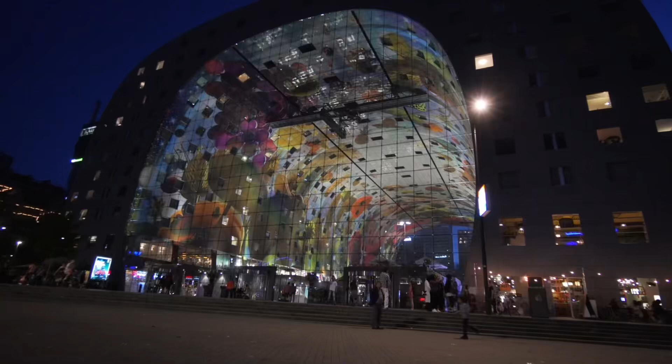The Markthal in Rotterdam epitomizes modern construction excellence, overcoming the city's unique soil challenges through innovative engineering techniques.

The project began with a robust perimeter wall employing a combined wall system of steel pipe and AZ-type steel sheet piles to mitigate groundwater infiltration and ensure stability.

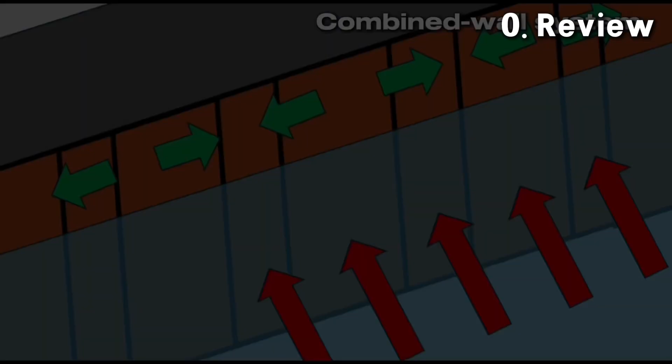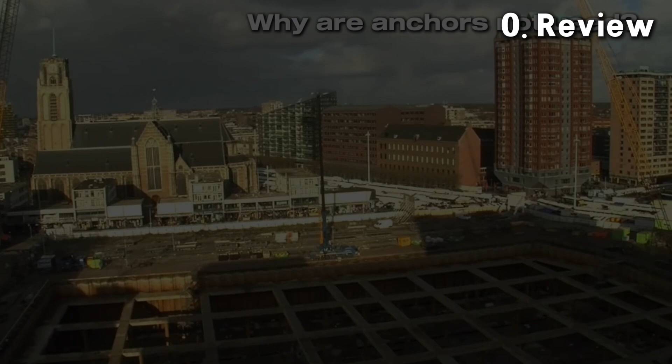A network of over 2,200 piles, initially functioning as tensile piles, anchored the structure, resisting buoyancy forces before transitioning to compression piles as floor slabs were completed.

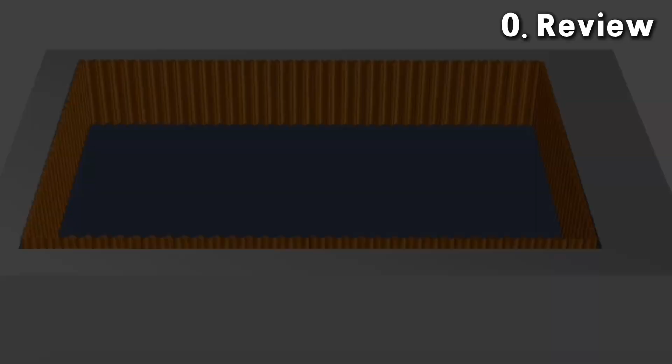To manage groundwater pressure and ensure soil stability, the construction pit was filled with water to levels above NAP early in the process. Excavation continued underwater to depths of NAP minus 12.1 meters and locally to NAP minus 13.1 meters before the installation of an underwater concrete floor.

This approach effectively balanced external pressures and enabled the seamless progression of the Markthal's construction.

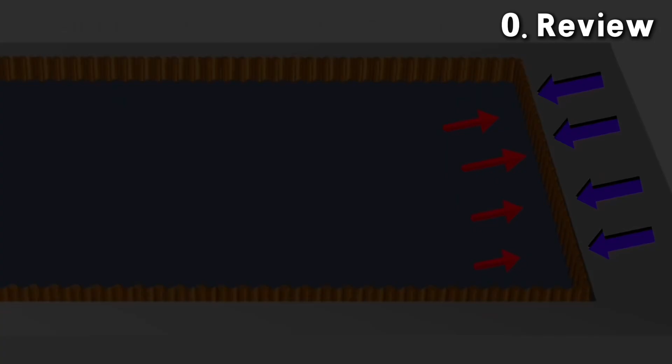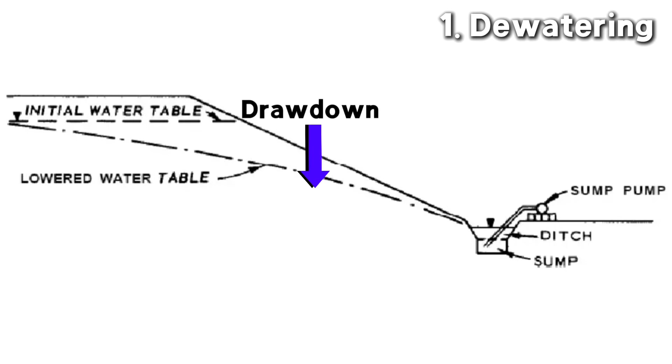It was initially uncertain whether any leakage could be adequately controlled using open dewatering on the pit bottom. Therefore, as a control measure, the dewatering plan included the option for pressure relief dewatering to lower the groundwater pressure to the excavation level. A maximum lowering to NAP minus 6.0 meters was imposed to limit effects on the surroundings.

Without well formation or leakage, the dry excavation required lowering the pressure head to about NAP minus 4.5 meters to maintain vertical stability of the cover layer.

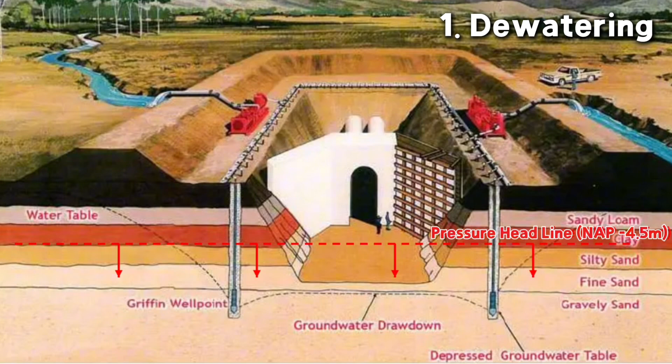In the end, no visible leakage occurred during dry excavation, likely also due to the horizontal anchoring of the Holocene cover layer from NAP minus 12 meters by the new foundation piles.

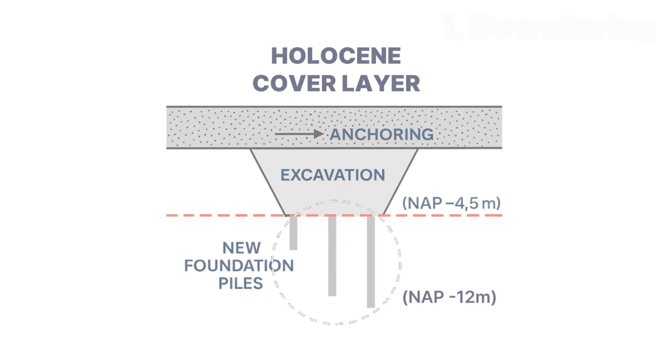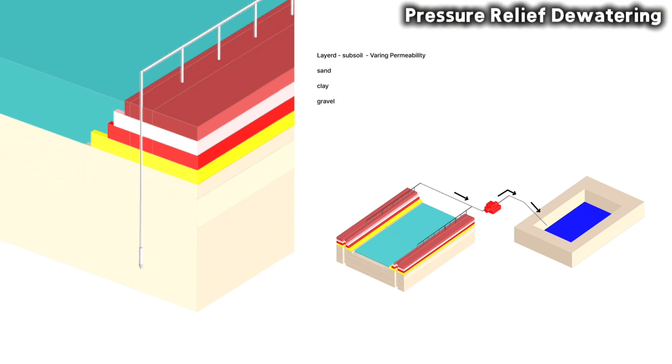This targets the lowering of groundwater pressure from deeper, confined aquifers. Deep wells with submersible pumps are installed around or within the excavation site.

To prevent uplift failure, also called heave, of the excavation bottom, especially before the construction of a heavy base slab.

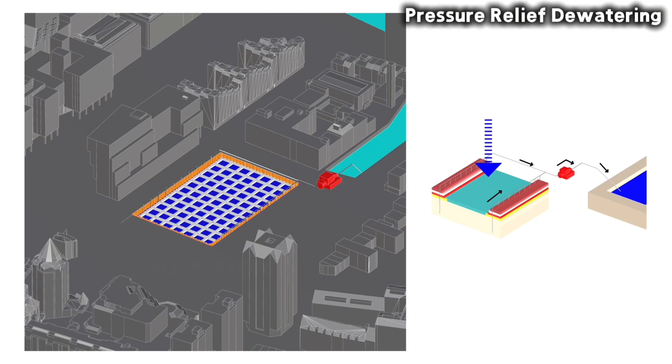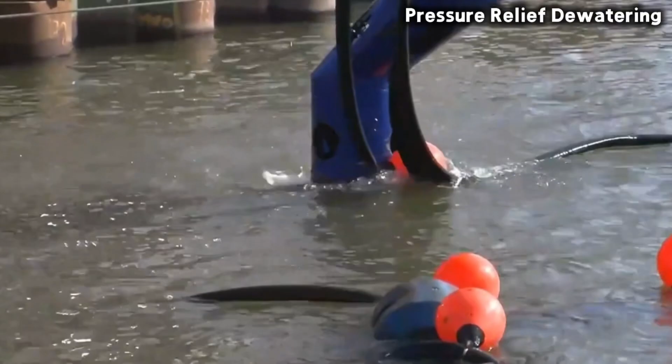Implementation: multiple wells were drilled to depths of up to 30 meters, each capable of pumping 45 to 55 cubic meters per hour. Monitoring systems ensured groundwater levels remained within safe limits to protect sensitive nearby structures like the Laurenskerk.

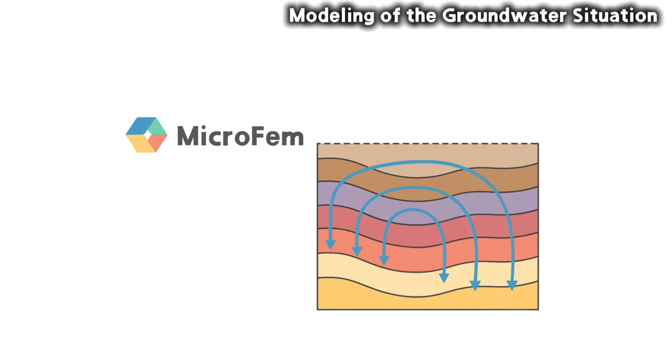To determine the effects of pressure relief dewatering in Rotterdam, a numerical geohydrological model was set up using the finite element program MicroFEM. The model consists of 6 layers.

The values for geohydrological parameters were taken from the groundwater map of the Netherlands and Regis, and then calibrated using long-term data from the Rotterdam Groundwater Monitoring Network.

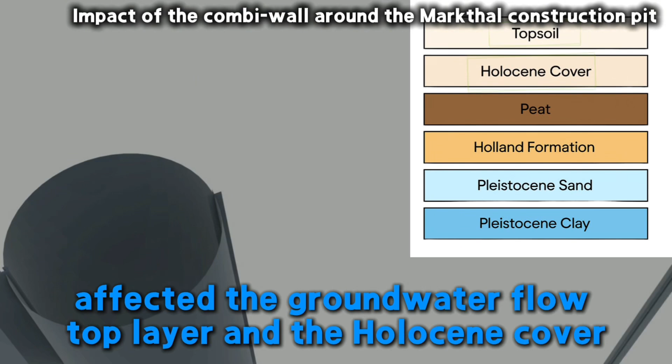The combi wall mostly affected the groundwater flow in the top layer and the Holocene cover. In the Pleistocene aquifer, there was no significant influence because the sheet piles didn't extend into the sand layer.

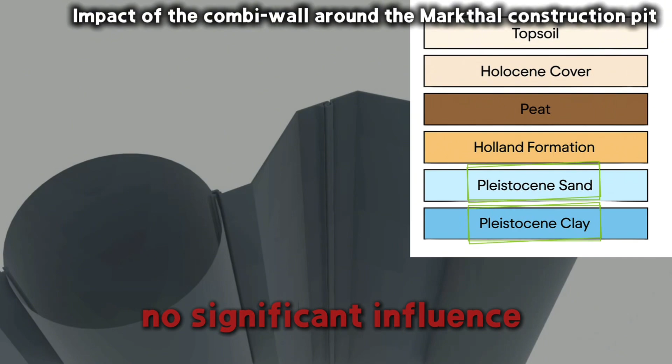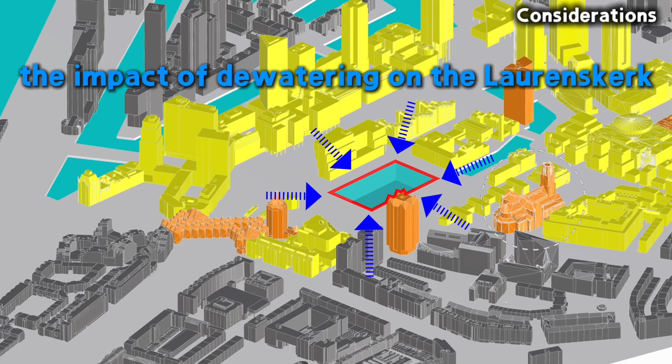The water demand for the Markthal's pressure relief dewatering is heavily influenced by whether other dewatering operations are active in the center of Rotterdam. There was a large water inflow from the river, and it minimized the impact of dewatering on the Laurenskerk by maintaining higher groundwater levels around the building.

However, this same inflow also posed a challenge, as it made it more difficult to achieve and maintain the required pressure head reduction within the construction pit.

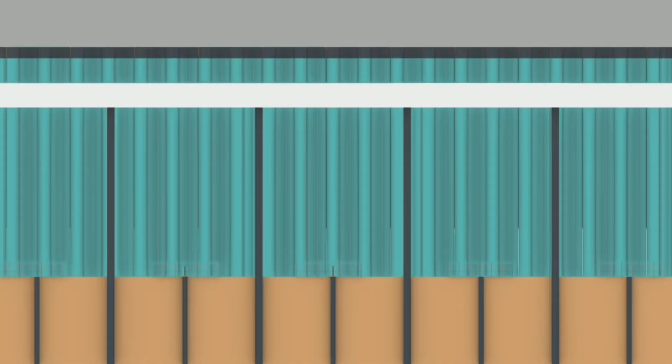Since the timing of various dewatering projects could change, 3 scenarios were modeled for the permit application. The final dewatering system design consisted of 9 wells, mainly concentrated on the south side of the construction pit.

To protect the historic Laurenskerk during the Markthal excavation in Rotterdam, engineers analyzed long-term groundwater data.

They determined that lowering the pressure head in the first aquifer to NAP minus 5.5 meters for up to 6 months would not cause ground settlement.

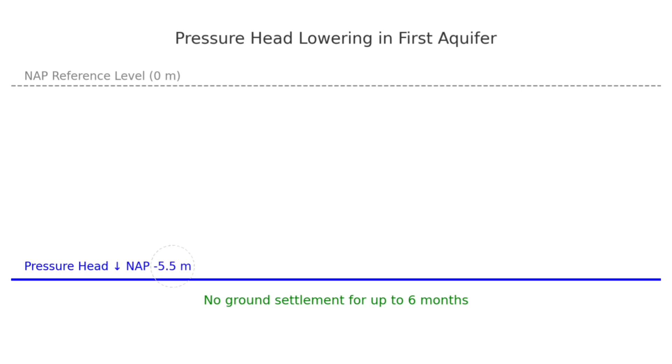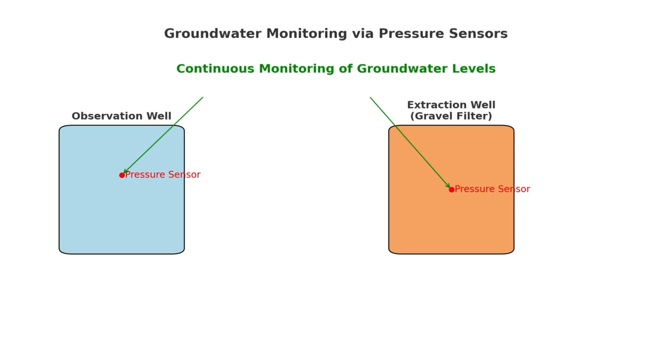The contractor, Jadon, implemented a dewatering system with 9 wells around the construction pit, manually controlled. Groundwater levels were continuously monitored using pressure sensors in 8 perimeter observation wells and within the extraction wells gravel filters.

All sensors and magnetic flow meters were connected to the Priva system, recording data every 30 minutes and providing real-time remote access. A deep observation well was also installed in the intermediate sandy layer, and the city operated a similar

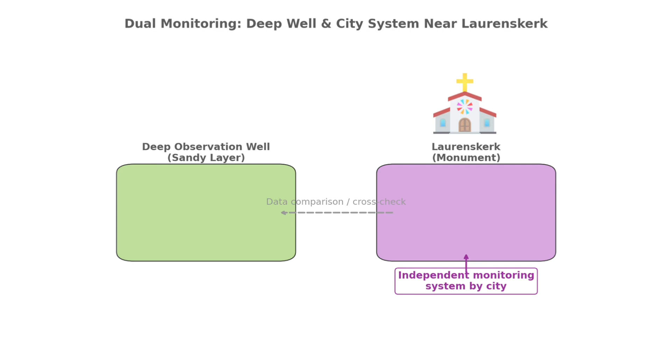setup near the Laurenskerk to monitor potential impacts. 7 wells operated regularly, with 2 on standby for emergencies, remotely activatable.

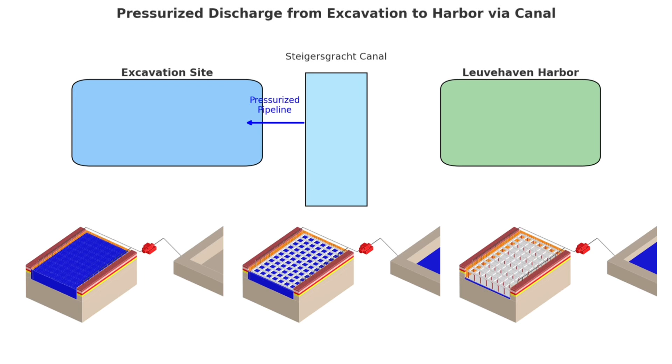Extracted groundwater was discharged through a pressurized pipeline beneath the Steigersgracht Canal to the Leuvehaven harbor. A booster station with pumps triggered by water levels in the sand trap and aeration tank maintained consistent flow.

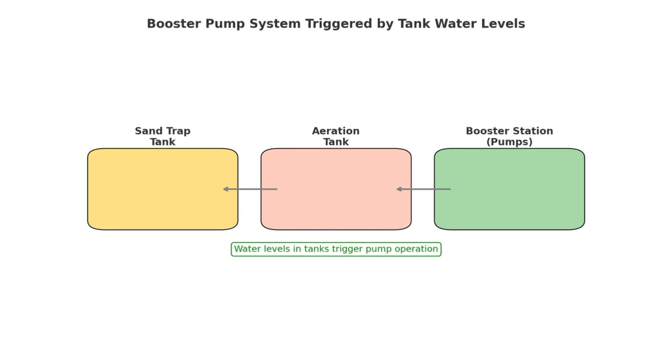A T-connector at the pit's northwest corner allowed re-infiltration of water near the Laurenskerk if needed. Monitoring showed slight upward ground movement over time, confirming geotechnical stability.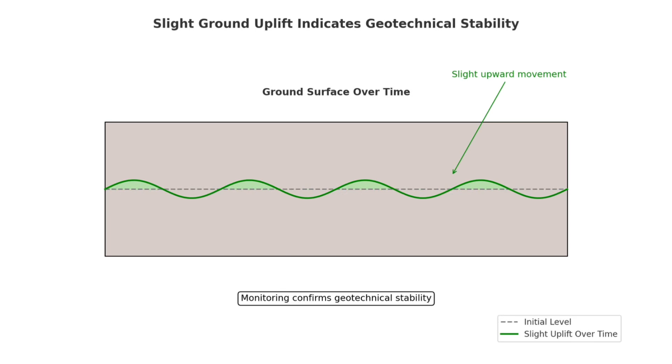In December 2011, a northwesterly storm raised Nieuwe Maas River levels, increasing groundwater pressure and uplift risk.

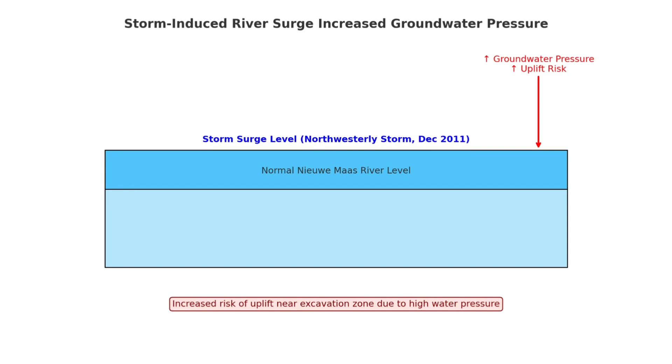Real-time monitoring via Priva enabled prompt pump capacity adjustments, effectively managing the risk and ensuring excavation stability. A careful dewatering process was undertaken, methodically lowering the water level to maintain structural integrity while paving the way for further construction activities.

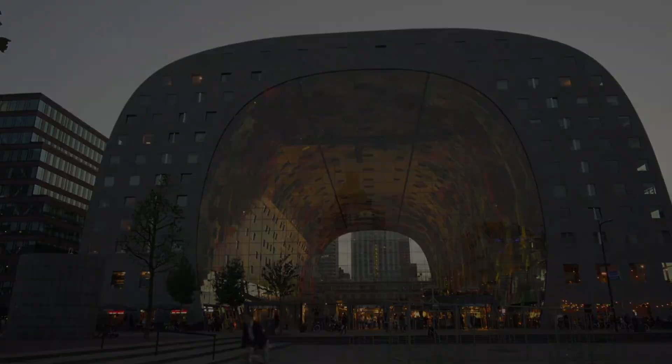As the foundational challenges were addressed, attention turned to realizing the Markthal's iconic arch through advanced engineering techniques. The arch was realized using tunnel formwork, with temporary support towers aiding during construction. Completion of the arch's structural system relied on highly tensioned steel cables that prevented outward thrust.

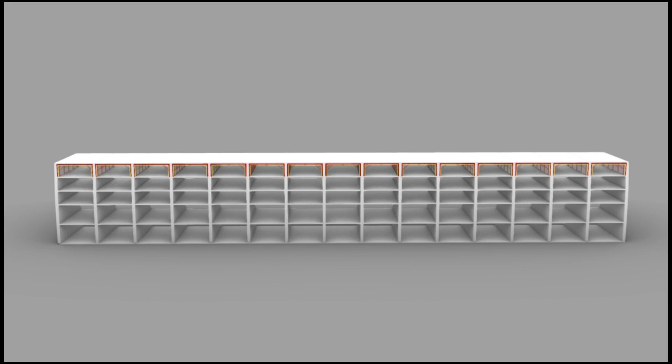The construction of the curved roof and apex of the Markthal's arch was one of the most critical phases of the project, requiring advanced engineering techniques to ensure structural stability. As construction reached the 10th floor, both arch legs were temporarily capped until the keystone was installed to lock the arch. This process helped maintain resistance to lateral forces during construction.

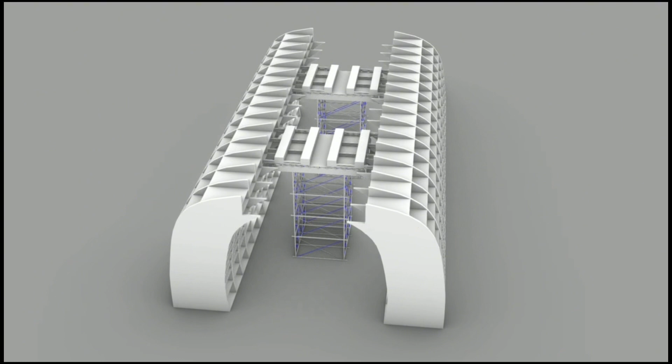To improve efficiency and control, the curved roof was divided into 4 main sections. Each section was carefully managed to preserve structural integrity during the build. For each section, temporary supports were essential. 2 large temporary support towers were installed under the arch to stabilize the 2 segments of each floor during both the construction and curing phases.

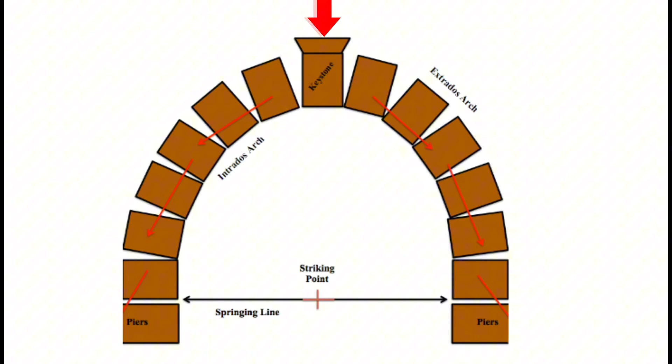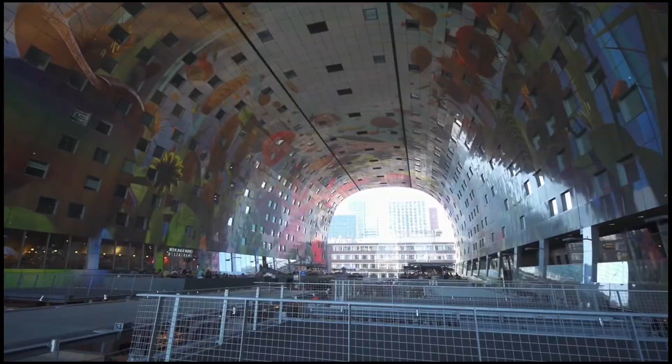The arch was completed with the placement of a central keystone element at the apex. This keystone was critical in locking all 4 roof sections together, enabling effective load transfer from the roof to the vertical legs and eventually to the foundations. After installation, the arch became self-supporting, with loads channeled down the curved structure through compression. This eliminated the need for internal columns, allowing for a spacious, uninterrupted interior.

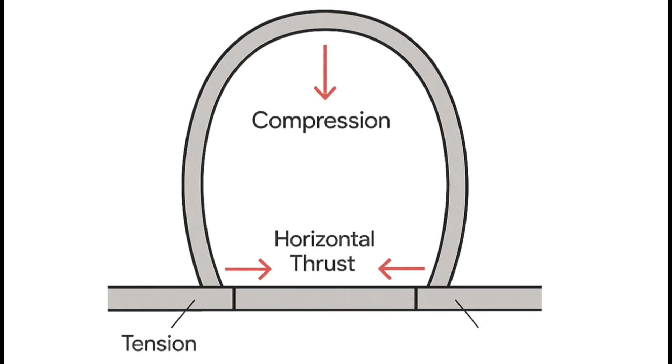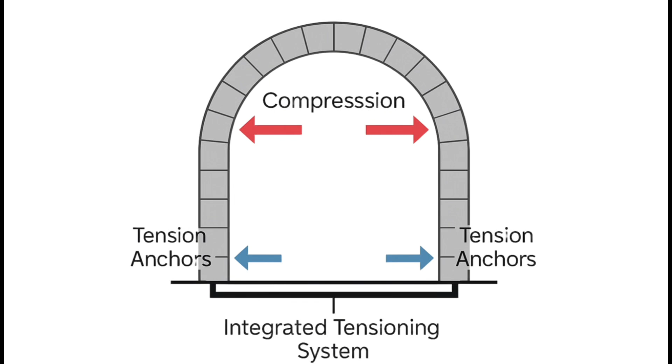However, the compression forces generated horizontal thrust at the base of the arch. To counteract these forces, tension anchors and integrated tensioning systems were installed beneath the structure. Additionally, the building's glass facades contributed structurally, acting in tension to help stabilize horizontal forces and forming part of the building's closed structural loop.

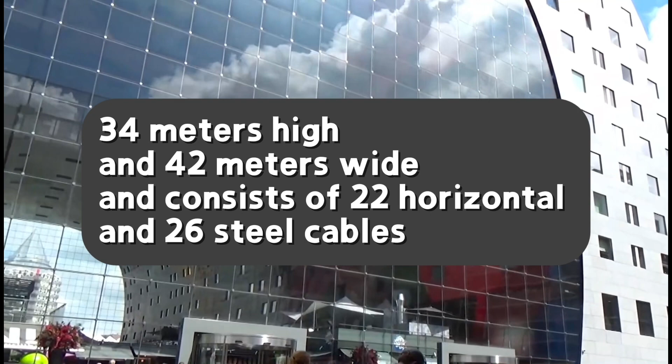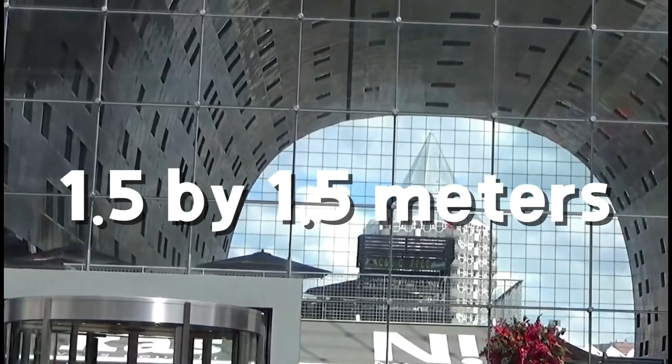The Markthal's cable net facades are a defining feature, combining transparency with advanced structural performance. Each facade measures 34 meters high and 42 meters wide and consists of 22 horizontal and 26 vertical galvanized steel cables. The cables form a grid that divides the facade into glass panels measuring 1.5 by 1.5 meters. This configuration supports the structure while providing panoramic, unobstructed views.

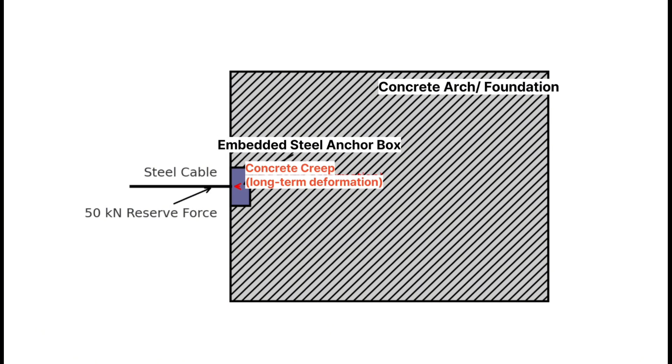Each 31mm diameter cable was pre-stressed using a hydraulic tension bridge with a maximum applied pretension of 300 kilonewtons. During the process, the cables were stretched approximately 150 millimeters. To accommodate the long-term creep of the concrete, an extra reserve of 50 kilonewtons was built into each cable's capacity. The cables are anchored in steel boxes embedded into the concrete arches and foundation, ensuring long-term stability.

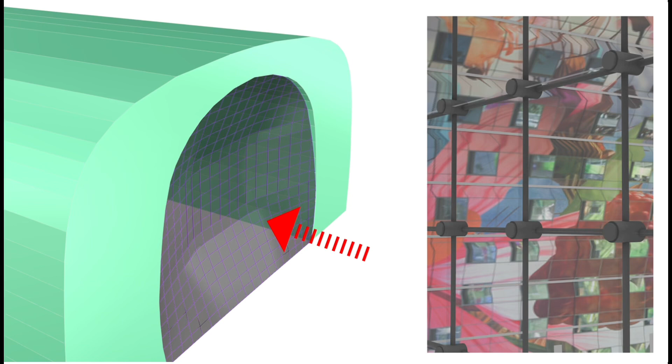One of the biggest challenges in implementing this transparent facade was managing the deflection of glass panels under wind loads. Unlike rigid mullion systems, cable net facades allow for significant movement. In Markthal's case, wind loads could cause the facades to deflect inward and outward by up to 700 millimeters, resulting in a total displacement amplitude of 1.4 meters at the center.

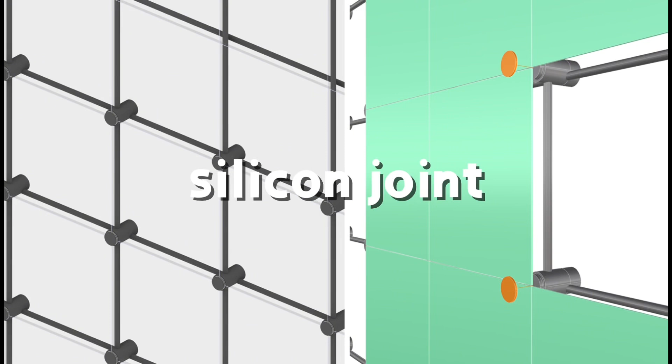To handle this movement, special detailing was required at the connection points between the cable net and the glass. The system used silicone joints between panels to allow flexibility while maintaining airtightness and waterproofing. These joints accommodated in-plane and shear movement from both wind and thermal expansion.

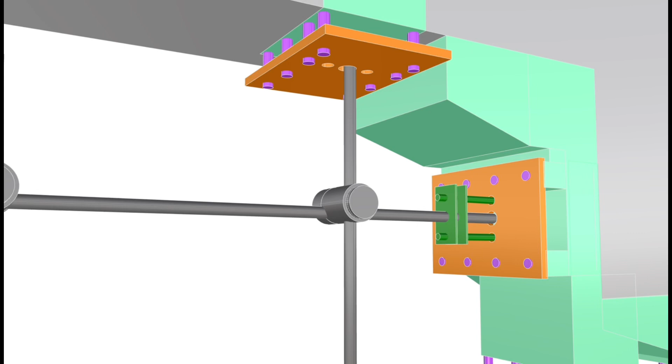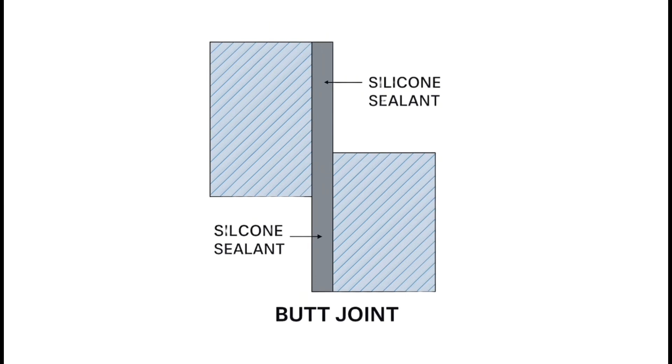At the panel corners, rubber profiles were used to absorb torsion and prevent stress from concentrating in the laminated, heat-strengthened glass. In frameless or minimally framed areas, butt-joint silicone sealants filled the gaps between the panels to maintain a smooth and continuous surface. This detail helped the facade remain functional and safe despite the dynamic nature of its support system.

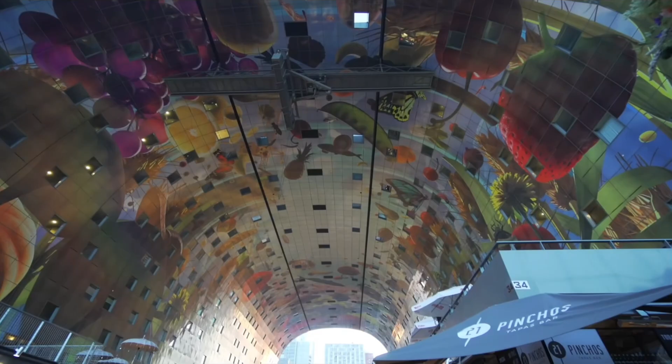Overall, the Markthal's arch and cable net facades represent a balance of architectural vision and engineering precision, demonstrating how structural systems can enhance both function and form in complex urban projects.

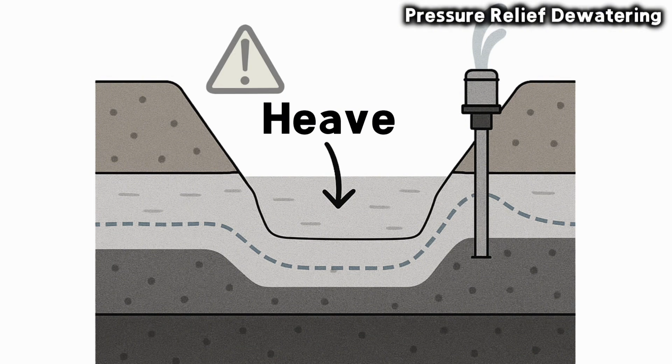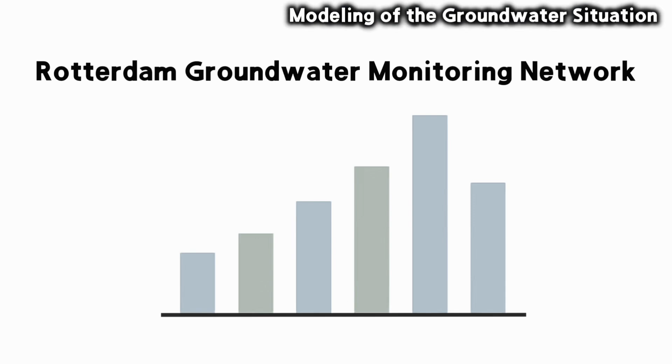This week, we explored the Markthal project in Rotterdam, how precise dewatering and structural coordination can enable complex urban construction without compromising surrounding heritage or stability. The careful lowering of groundwater ensured excavation safety and preserved nearby sensitive structures.

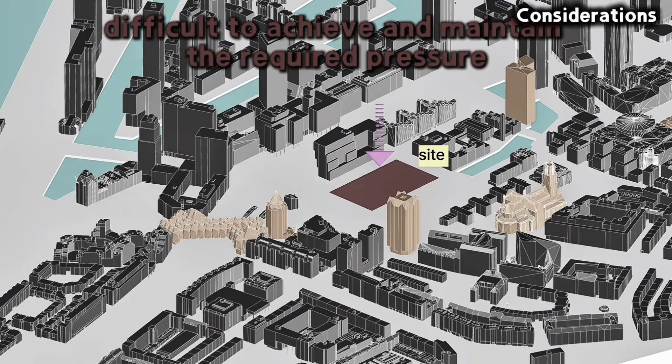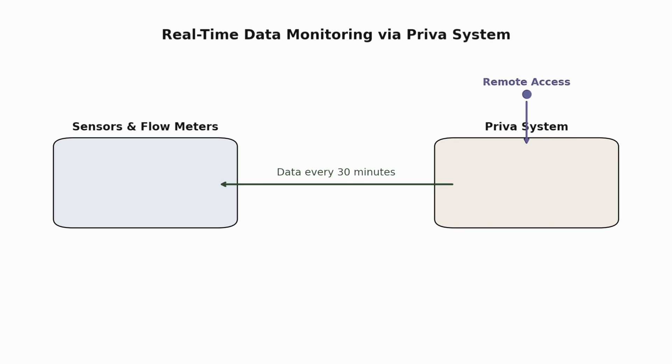Once the site was stabilized, construction transitioned seamlessly into the iconic arch phase, where innovative engineering allowed for a column-free interior and visually striking cable net facades. The integration of flexible, weather-responsive materials and tensioned structural systems not only ensured durability and performance, but also emphasized openness and transparency.